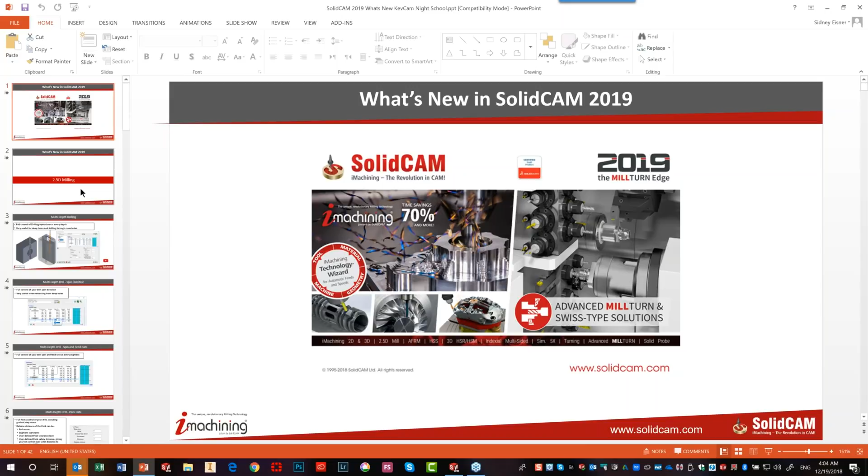Okay, so let's get going. What's new in SolidCAM 2019? I'd like to start off with one of the new features that we have inside 2.5D milling, and we call this multi-depth drilling. Multi-depth drilling is something that can be used for both deep hole drilling and for parts where you have cross holes. This particular type of operation is a completely new operation, and it gives you full control of how you want your drill to move through your hole. It's a completely manual operation, you can tell it to do exactly what you want. This is very important, especially for deep drills and for cross-hole drills. I'll give you a demonstration of that in a moment.

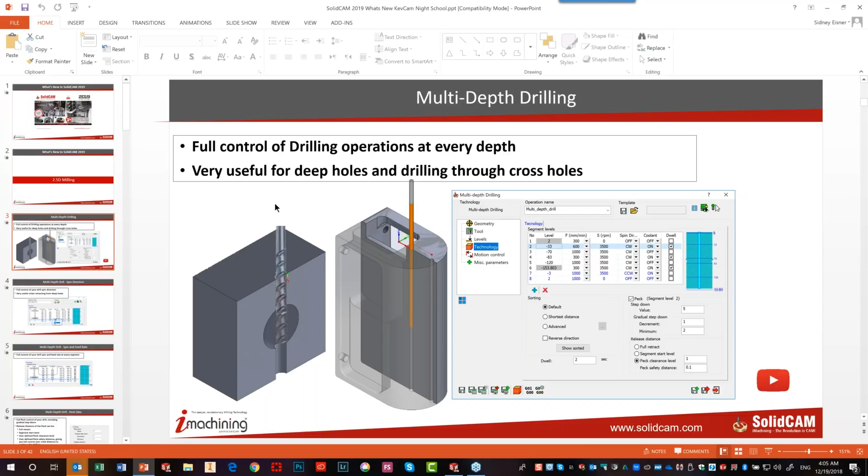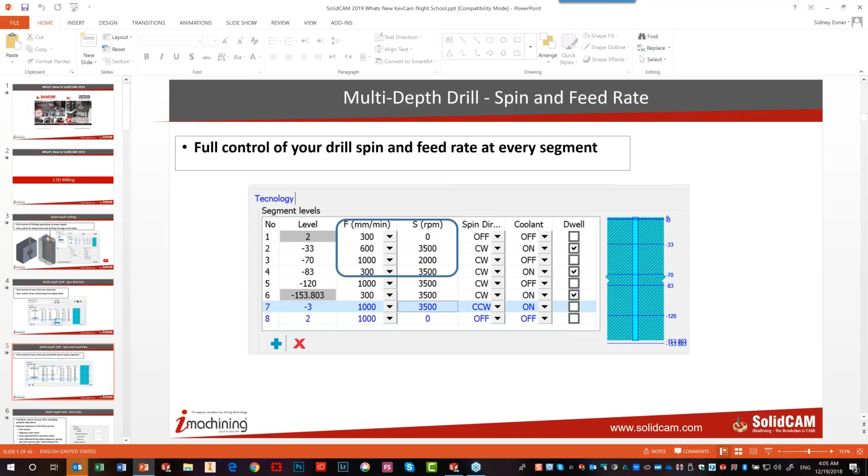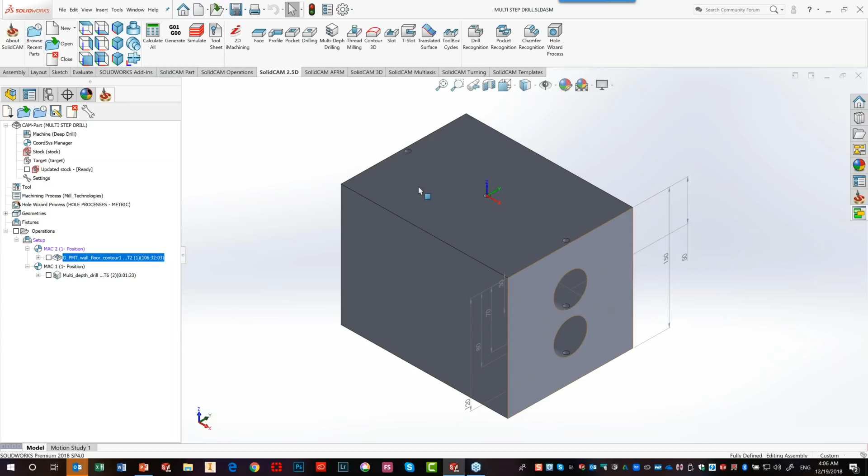Okay, we give you complete spin direction control. We also give you complete control at every single level of your spin rate, your feed rate, and also pecking. At every single point you have complete control of what's going on. Now I'm going to upload a part here for a moment. What you see here is a simple part, but the idea here is as follows. Let me just do this, you can see a little better what I'm talking about. You'll see that I have holes going through the drill.

I also have cross holes going through the part. Now, up until now, to get complete control in your regular drilling operation, it was kind of difficult, because what I'd like to do is drill out over here, and as I'm going from here to the next point, go directly down without pecking, then continue pecking here, then go directly down and continue pecking here. This is something I was not able to do in the past. I would have to come up with some kind of workaround or even write it by hand if I wanted to do something like that.

So we've added a new operation called multi-depth drilling, which we can see also over here. I've created an operation already. I'm going to show you the operation that I've created, and then I'm going to suppress this, and show you step by step how I've created the operation.

If I were to go into the operation I have over here, you can see in the beginning it starts out like any old drilling operation. You have your geometries, your tools, your levels exactly the way we had it previously, and we're going to a total depth of 150 millimeters. Now, the big difference is in technology. This is where you have complete control. This is how it looks after you've programmed it.

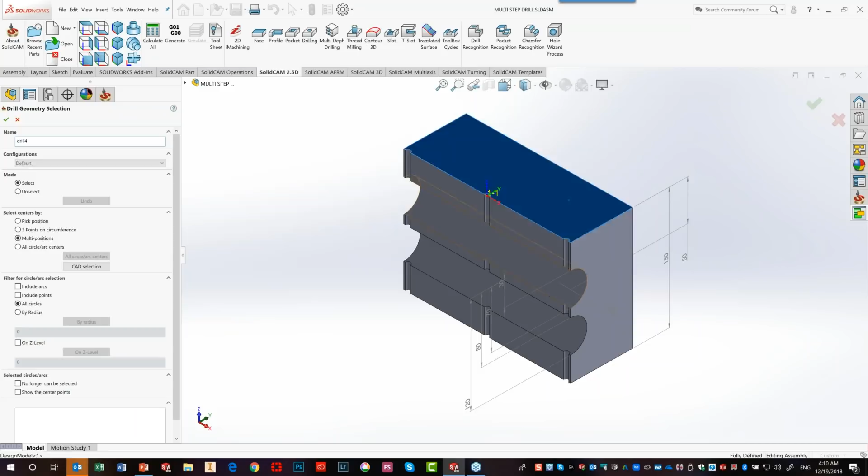We'll create our geometry. In this particular case, I want the 3 holes that are over here. I'm going to choose my drill. In this particular case also, it's this one over here, a 6 millimeter, just under 1/4 of an inch drill.

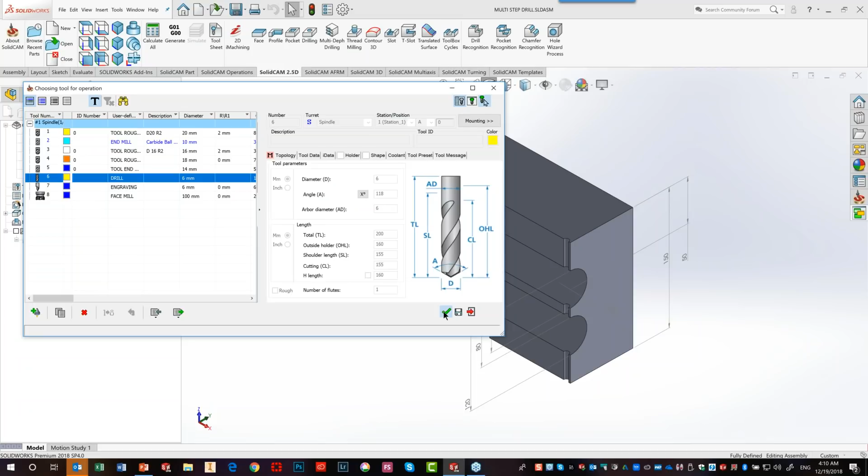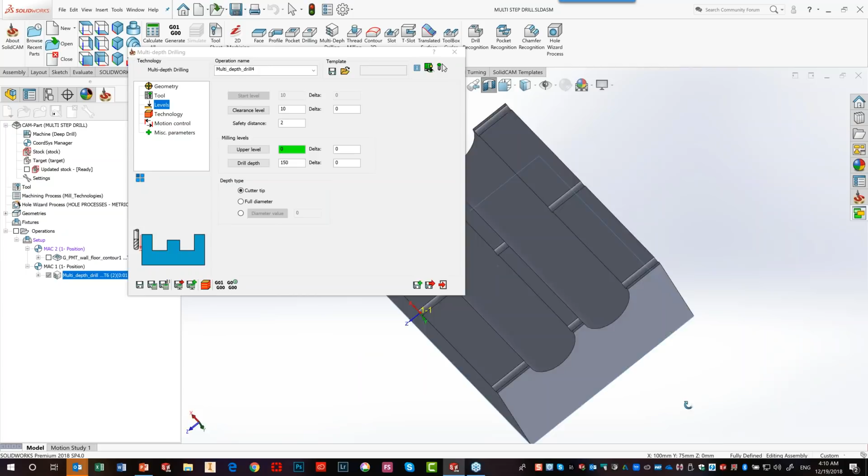That is approximately, you can see the length here, about 200, which is about just over 8 inches long, and you can see how much is outside the holder as well. My levels, upper level is at the top over here, my depth is at the very bottom over here. Sorry, here we go, my mouse is giving me a little crazy over here. Just a second. I think that mouse needs a cup of coffee too. Yeah, I think so too.

Okay, here we go, there we go. I have to be inside the field. Now I need another cup of coffee. Here we go. Okay, so now I'm going down to that depth, and I wanted to go full diameter, and I also wanted another -2 on my delta. So we have 152 plus whatever the full diameter will give us.

Okay, up until now, we work just like a regular drill. Now let's go to technology. In the technology, as I mentioned before, you'll get the start with the safety distance and the end over here, the actual bottom, okay?

You can't go lower than the bottom because that's the end. That's the final level that you have decided to go to at the very end over here. Now, how do I add a segment?

Before I add a segment, I'd like to set my spin direction. Since it's the very first one, I can have it go in any direction I want, but I want it off for now—no spin at all. You'll see my spin rate turns to 0. I don't need coolant, so I'll turn that off, and I definitely do not need dwell on at this moment.

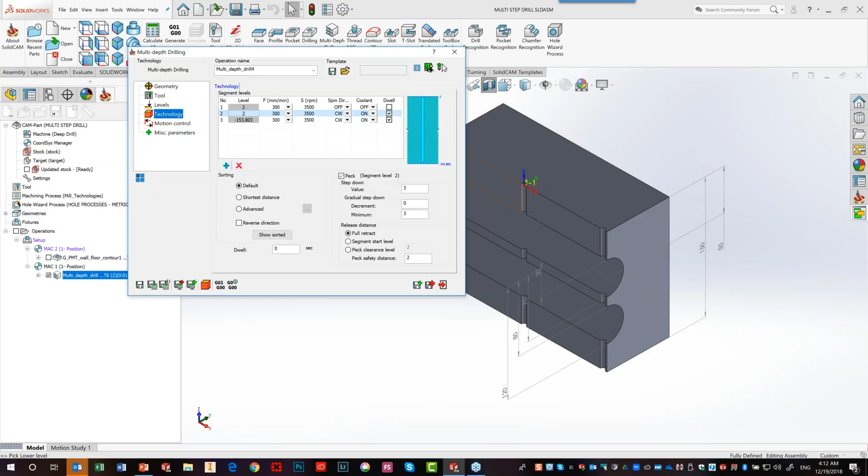Well, if I take a look at my part over here, I see I'm going to go down, and that's 30 millimeters. So I'm going to say, okay, I want it to go now to -33. At what feed rate? Let's say I have a feed rate of 600. Okay, I'm going to leave my spin rate over here as shown.

This should have been 0. Just a second. Okay. I'm going clockwise. I want my coolant on, I want my dwell on, and I want to have control of my peck. Now let's take a look at how we can control our peck over here as well.

If we see our peck is checked on, I'm going to say, okay, I'll go down every 5 millimeters at a peck. Now, we also have an additional option over here of gradual step down, where I can say, okay, I stepped that down 5 millimeters, but I want to decrement at every single step down by 1 millimeter. So my first step will be 5 millimeters, my next step will be 4, until I hit 2 millimeters. Once I hit 5, 4, 3, 2, it'll stay at 2 millimeters and keep on pecking at that level.

Now, next over here, we have our release distance. Do I want to go all the way back, or do I want to go back to the start of my segment? Or I may want to do something else—go to peck clearance level, where I say, okay, when I peck, I only want to go up 1 millimeter, and when I go back down towards my part, I want to go 0.1 millimeters, so very, very close to where I actually stop. So I have complete control.

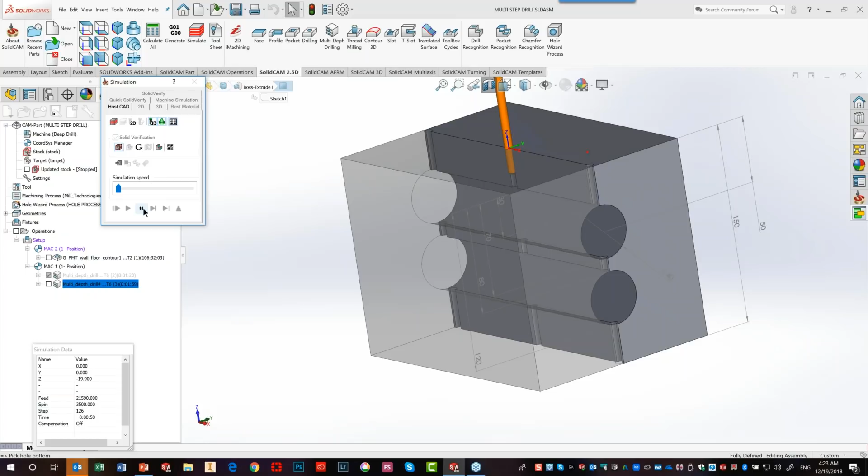And as he's playing that for you, guys, the real nice thing about this too is you can use a regular drill bit, but you can also use a custom form tool as a drilling operation. So let's say that custom form tool needs to be pushed pretty hard through the first half, but that second half, as it enters a larger diameter or a counter bore, we want it to slow down a little bit. This is right where this comes in very handy for you guys as well.

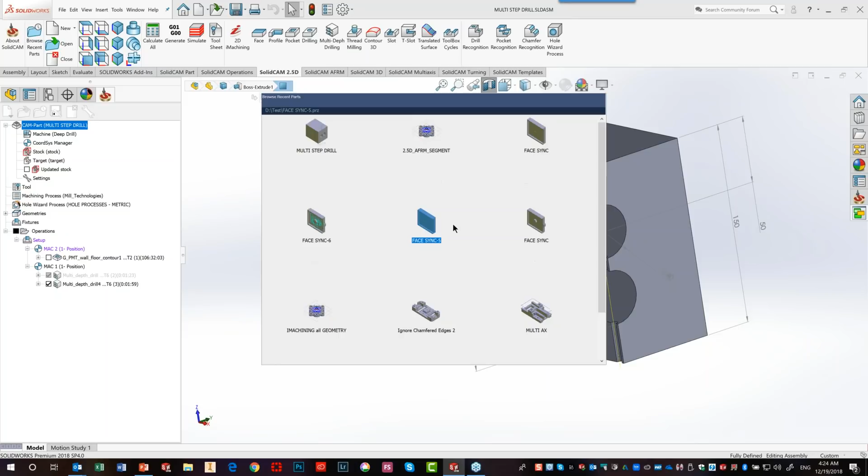Okay, now one more, let me open up just one more part for this, just a second. Let me see if I can see the parts. I just have to open it here.

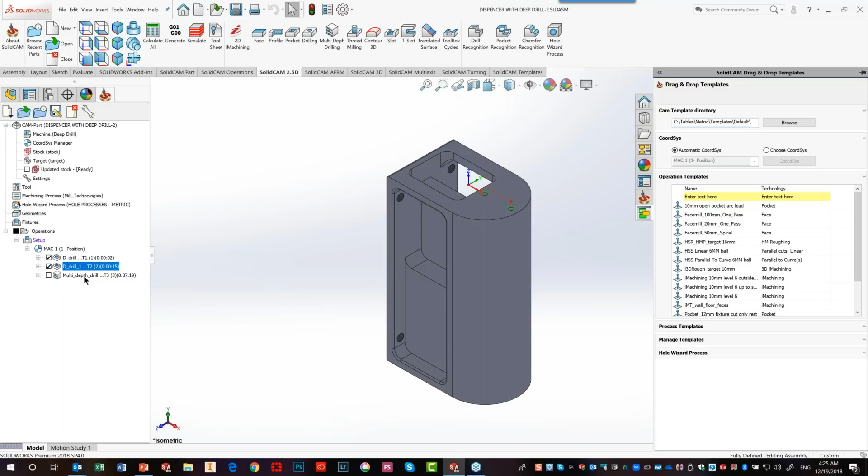So just another example. I'm not going to program this already because I have it done over here. This part is actually a very long part, no through hole, just a very, very long part. So what people may do is a regular drilling operation at the beginning, a spot drill, and then a regular drilling operation, going down as far as they can with a regular drill. Then for the deep drill, they'll do something like this. I'm just giving an example. You have your levels going down 250 millimeters.

And into your technology, they'll go down to 2 millimeters. Now between 2 and 5, they'll keep their spindle off, because as it's going down in from the very top, you don't want to start spinning it. You want to go into the hole that's already there without spinning, because if you start spinning a really long drill while it's out there with no support at all, it's going to go flying all over the place. So that's just another thing I wanted to show you over here as well.

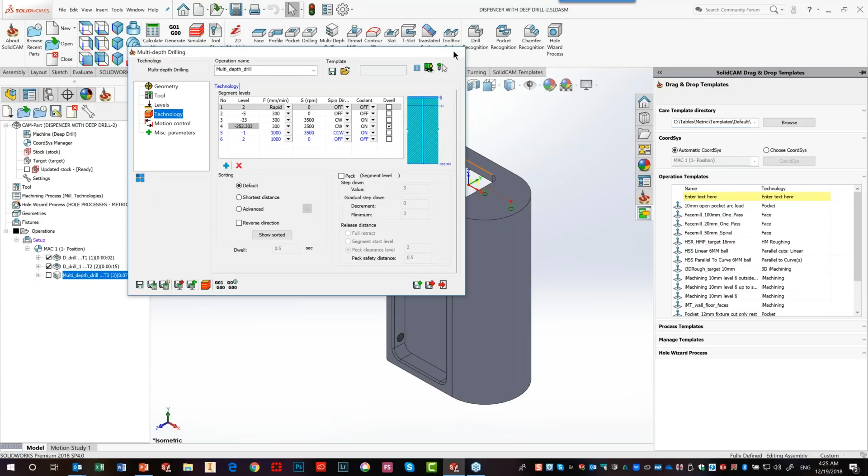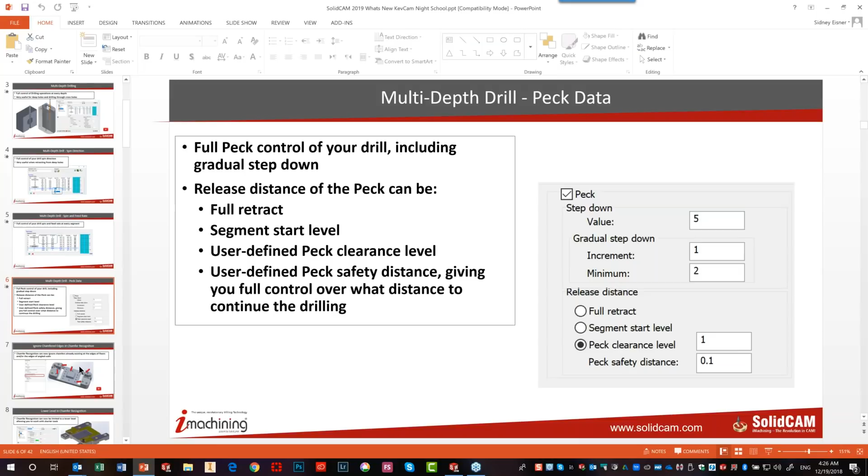Okay, so now let's go to our next feature that I'd like to show. Where was I? Ah yes, chamfered edges and chamfer recognition.

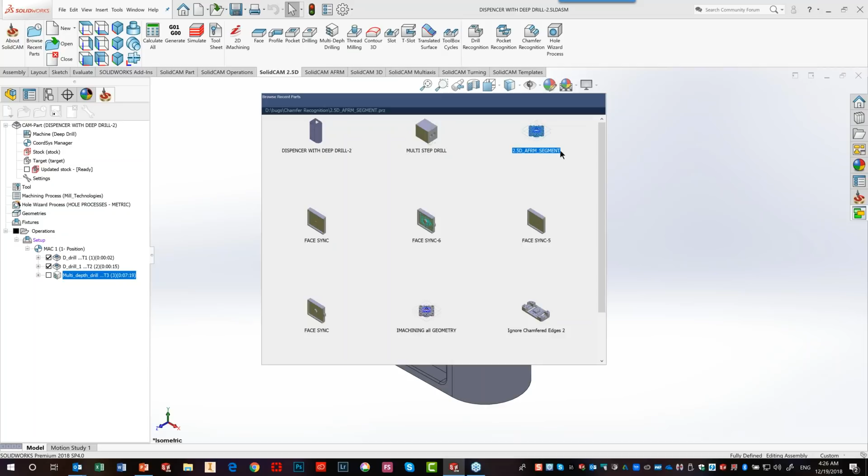Now one of the problems we always had with chamfer recognition is that it would take all of the edges, even edges that you may not have wanted it to take. For example, if I were to show you this part here, let me load it. Let me see, where are we? We are over here, there we go.

In this particular part, what you can see here is very simple. I'd like to do chamfer recognition on the part. However, if I was to do chamfer recognition, you can see that we want to do the edges over here, but this edge already has a chamfer on it, and I don't want to grab that element to put a chamfer over there, because that's not going to help me. Now even this I may not want, because this already has an angled wall, and I don't want to put a chamfer over there. I just want to keep it exactly the way it is. So there are certain edges I do not necessarily want to have, because they already have some kind of angle on that wall itself.

So let me just suppress what I have over here. I have to actually delete what I did over here. Delete it. Okay, and what I'm going to do is go into chamfer recognition. I always like, by the way, using the 3D model protection. Always helps.

Now, up until this point, if I click on the part, my minimum diameter would include these edges over here as well, and these edges, and I really don't want that.

And my levels - one more thing, since I'm here already, we've made a change in our levels as well. We've added the option of controlling between which levels you want to put your chamfers on. This is extremely important. Sometimes you have a part that's very deep, and your chamfer tool may be relatively short, and you don't want to go that deep into the part. So now you can control your lower level, but right now I don't need it.

So I'm just going to put in my chamfer depth of, say, 0.2 millimeters. My technology stays the same, cutting diameter, and my links - I can put in any kind of link I want. Let's put in a link of an arc.

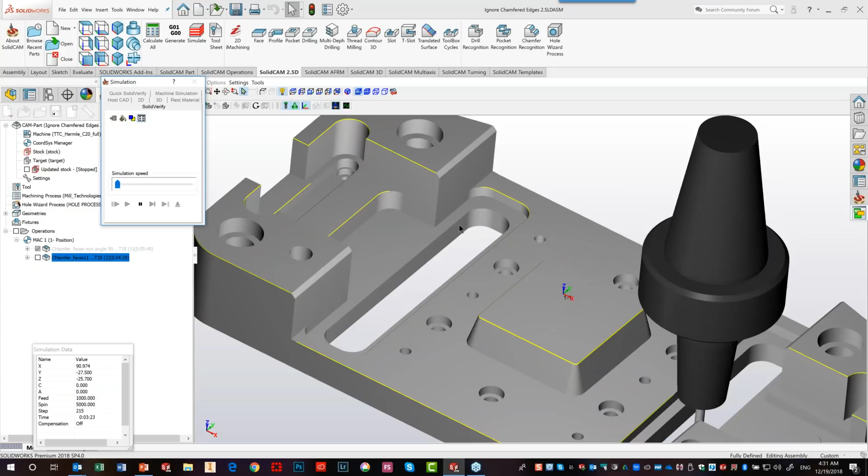This has been a huge request by you guys, being able to really control that chamfer recognition. So now this gives you the ability to really fine tune that chamfer recognition for what you guys were looking for. That just kind of goes to show you guys that we definitely listen to you guys when it comes to what you want to see in the software.

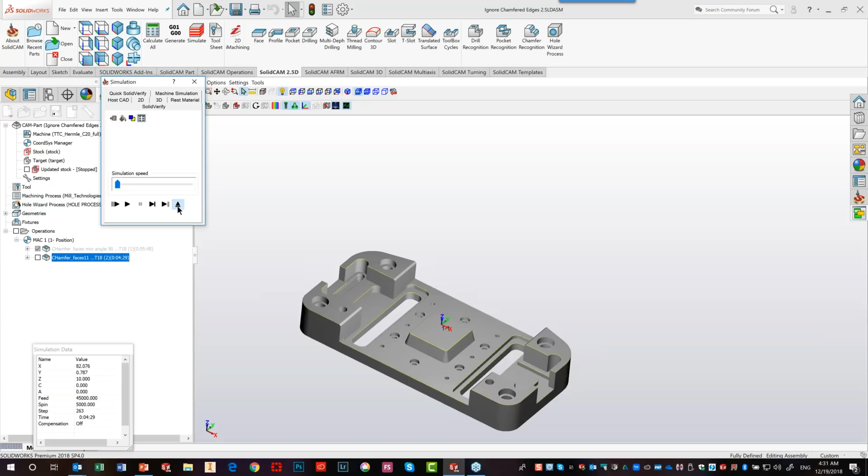That's right, and I may have had a problem listening before, but that problem kind of got resolved when I got hearing aids put in, so I have no problem listening to people now. Okay, all right, I like to add a little humor every now and then. Okay, now let's continue on.

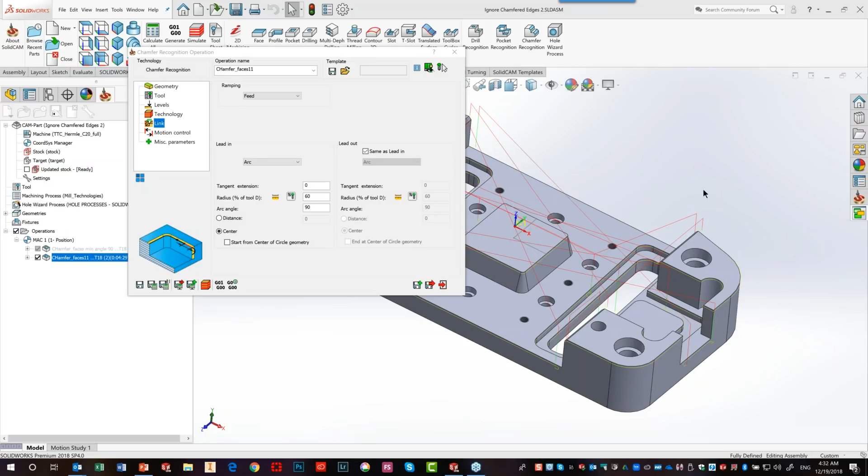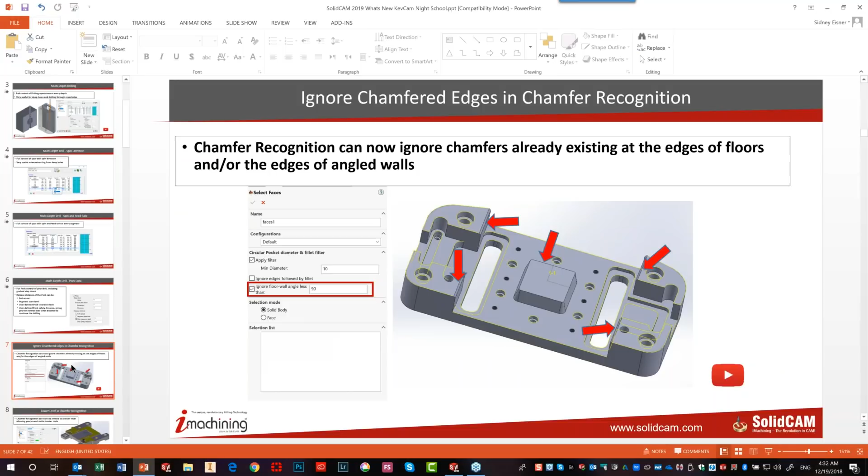Okay, so that's what I talked about. Where are we? Over here - lower level and chamfer recognition, I had mentioned already.

Yes, multi-tool in-pocket operation. In 2018, we had added multi-tool inside iMachining. We've also added the same thing now inside our pocket operation as well. For example...

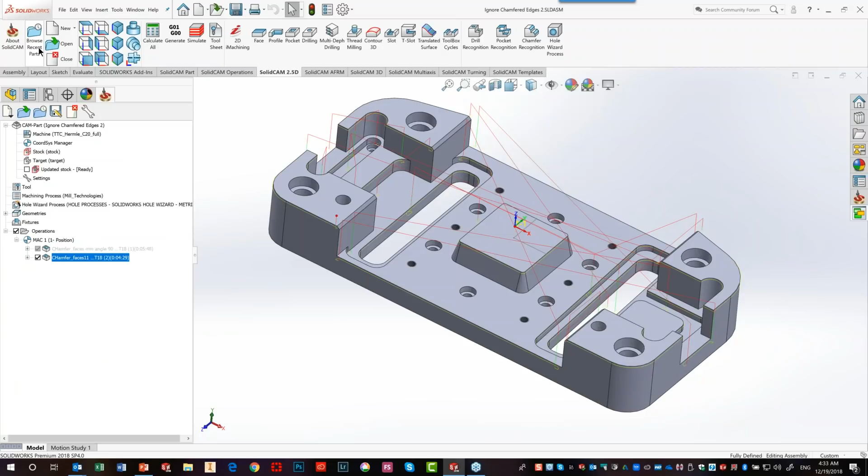Let me open up a part. Not browse, I'm going to open actually a part. Yeah, I'll do this one, that's good. Also good.

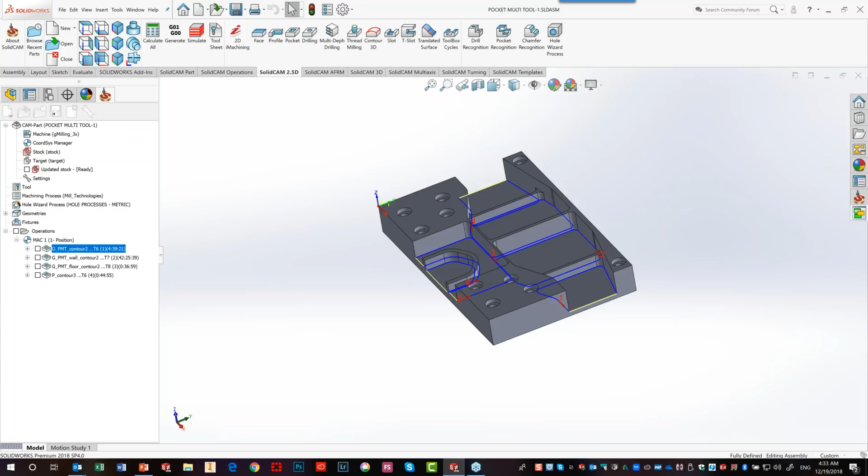I'm just going to open up the operation that I created already, where I want to do several pockets over here. And we have here what we call multi-tool. So if I go into my tool, you can see you can select several tools over here, just like in iMachining that we had before.

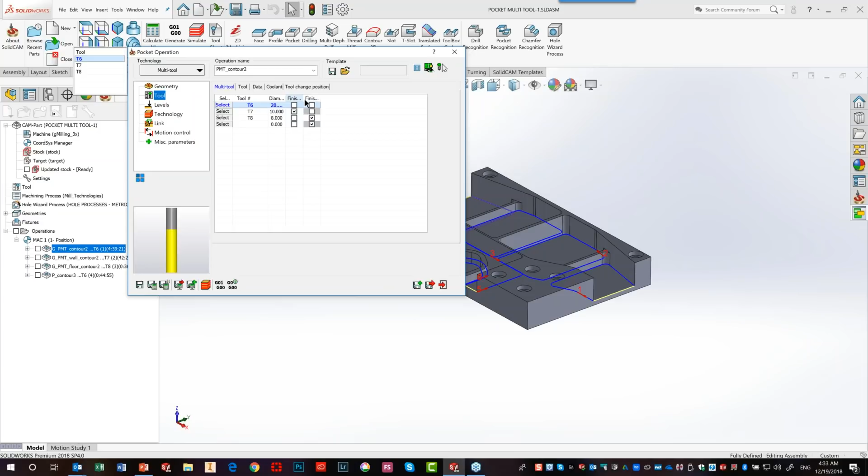And I can also tell it over here if I want to have it do a finish on the floor or wall. Let me enlarge that - and the same thing over here. So within one operation, I can use three tools, and the result will be three operations.

Now, if I go and edit from any one of these, say from the second one over here, it brings me back to the base operation, but to that particular tool. In the technology, it's the technology for that particular tool with the wall finish checked off. If I go to T8, you'll see that the floor is checked off. If I go to T6, which is just the roughing, you'll see nothing is checked off.

These are controlled, by the way, by this over here.

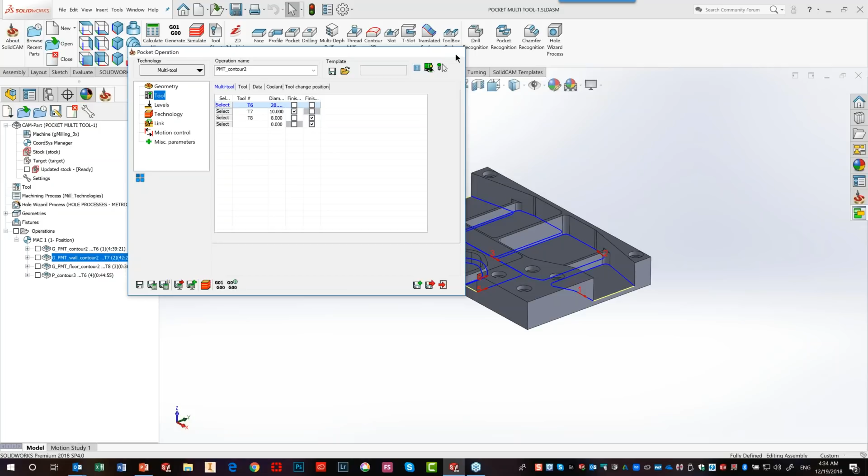Okay, so that is the option of the multi-tool, just like in iMachining, but we have it now in Pocket.

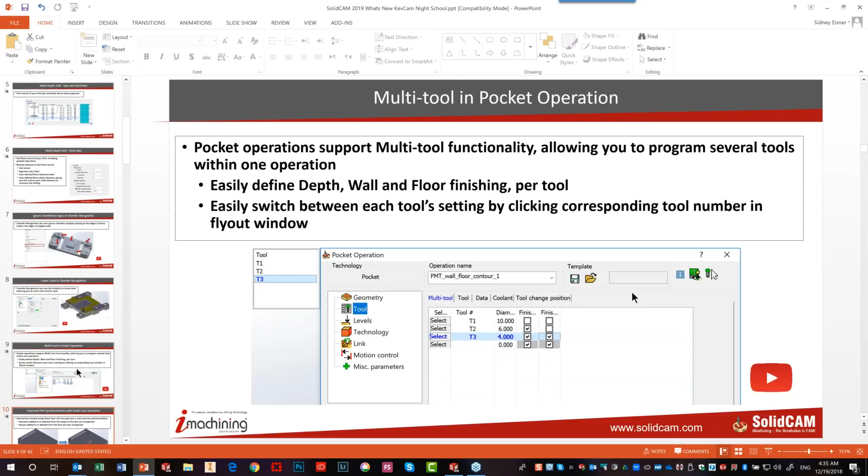So what we've done is as follows. Let me load that part. On purpose, I took a very simple part, so you can see exactly what's going on. This is made possible, by the way, by the use of SmartFace for creating your geometry.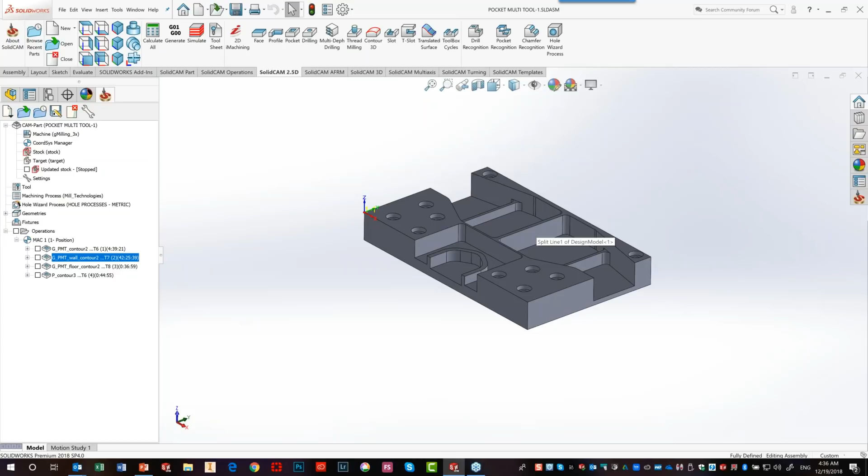So, for example, if I were to go to a pocket operation, choose my geometry using SmartFace to create my geometry - I always use SmartFace to create the geometry. I'll choose the tool, and I'm going to choose, let's say, that one, doesn't make a difference really. And my levels will be down to this point. Let's just do it at one time. We don't need to have everyone watch everything.

I like to work, use profile strategy. I'll leave the links as it is, no problem. Save and calculate. Okay, and you can see the toolpath does exactly what I expected it to do.

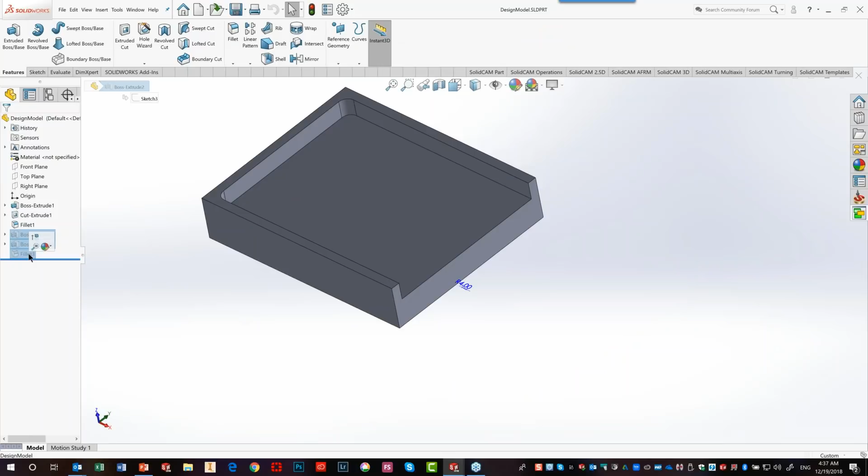Now what I'm going to do, let me go out over here, let me get rid of this. I'm going to open a part, and add something to the part. I'm going to add this boss over here and this over here. Now I'm going to the part. Obviously, I'm going to save.

And I'm going to check for synchronization. And you can see it needs to be synchronized. So I'm going to synchronize my part. And all I'm going to do now is take this and calculate it.

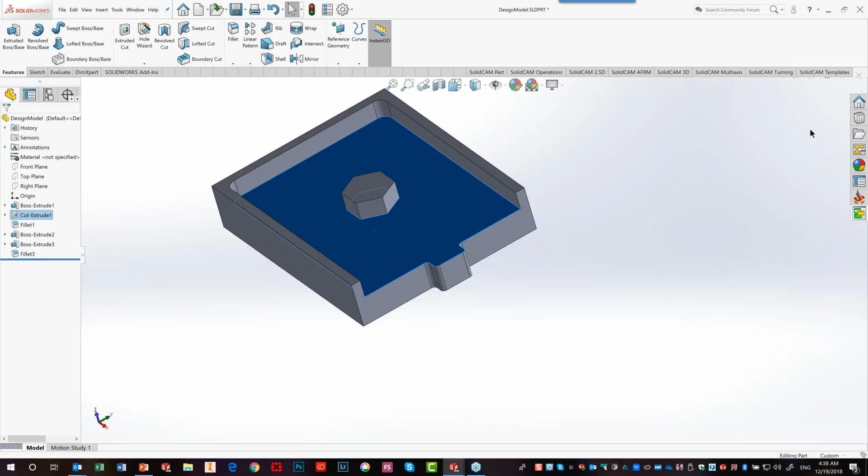As my geometry, we tagged the actual face itself, and we saw a change on the face that were related to those geometries, so to the change itself. So the change itself was now completely updated. So your synchronization will work a lot better now when you use SmartFace. So we physically linked ourselves with that SmartFace with the SolidWorks face itself, even though we added geometry in there, which would normally throw up a caution saying something has changed. Now, since we're using that SmartFace technology, it's automatically adapting to that new island or multiple islands in there. So just to show you guys that the associativity between SolidCAM and SolidWorks is extremely strong.

All right, next. Let me see what else I have up our sleeve.

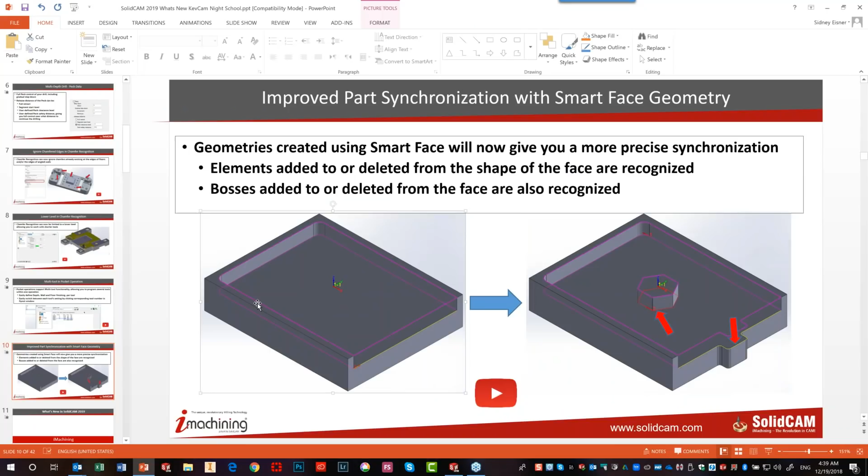Okay, now let's get to iMachining. iMachining, if you open it up in 2019, will look different to you. Now, we like to call it iMachining feature recognition, because what it actually does is recognize where your stock is, how much stock is left over. All of this is actually taken into consideration.

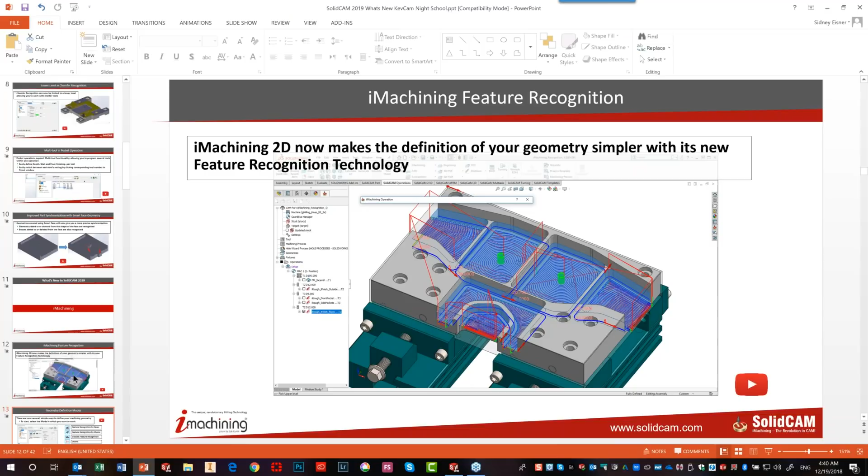Now we've added 4 different ways of selecting your geometries. You can select it just by faces, or feature recognition by chains. We have something called outside feature recognition, which will automatically recognize the outside shape and machine the outside only according to the stock that's left over on the outside. And then your old-fashioned way of, the way we work today, of just chains.

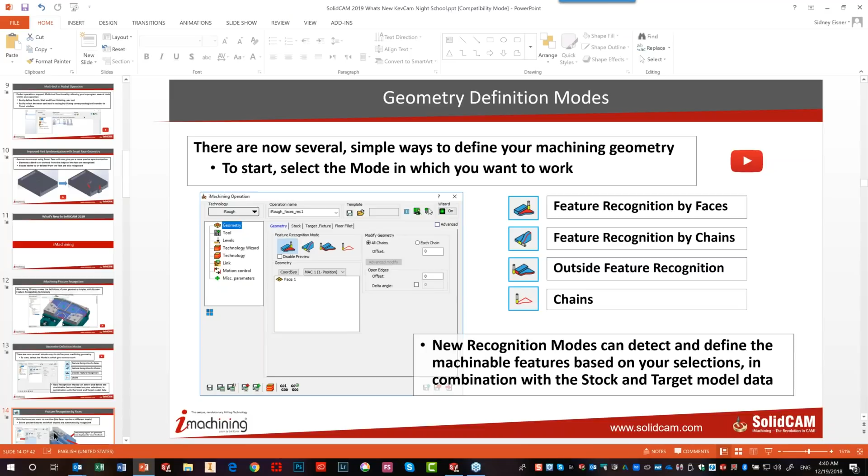Okay, let's see exactly how this is done. There's a lot more slides in here, it involves everything, but I don't like to always show the slides. I like to actually show it on the part itself. So what I'm going to do is open up a part. There we go.

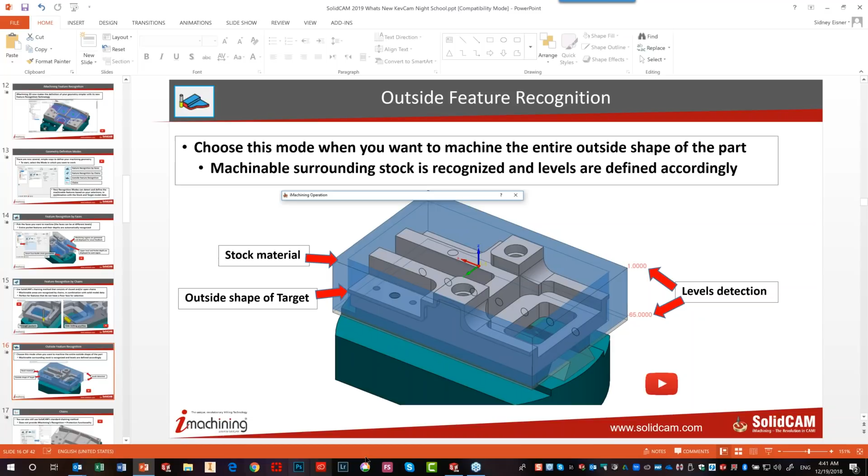Browse, and I'm going to open up. Yeah, I like this one. This is a good one.

Okay, now I just want to remind everybody, I personally, at this point, since I work a lot with development, the version I'm working in now is even just like the release of 2019 SP0. However, it's a development version because I also work in development at the time. But basically, everything is the exact same thing.

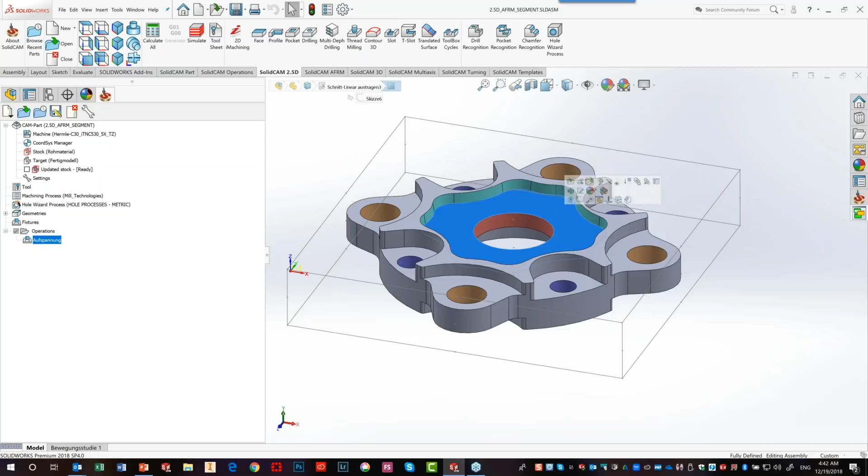Let me delete what I've done over here. The first thing I like to do when I go into my iMachining, if you take a look at the part before I even go into the operation itself, you can see we have different levels of floors over here. We even have this one on top over here, and we also have stock on the outside. If I show you the stock, you'll see that my stock is all the way out over there.

Just for your information. Okay, so I'm going to start my first operation. You can start it in multi-tool, or you can put it over to wherever you want, like in iRough, or iRough and iFinish, whichever way you feel correct.

Now you'll see over here different ways of choosing geometry that I mentioned before. We have, like I said, choosing faces, which I'll show you in a moment. Then choosing regular geometry is exactly the way we were used to, but it takes the stock and the features already on the part into consideration - outside feature recognition versus your regular chain features without any stock recognition or anything like that.

I'm going to start this operation. I first want to machine the outside of the part, so what I'm going to do is just click on that. When I click on that, you'll note there's no geometry that has to be picked - it'll automatically recognize the target and whatever stock is outside of it. So I'm not picking any geometry. The tool I'm going to use, I'm just going to choose whatever tool I want to use in this particular case.

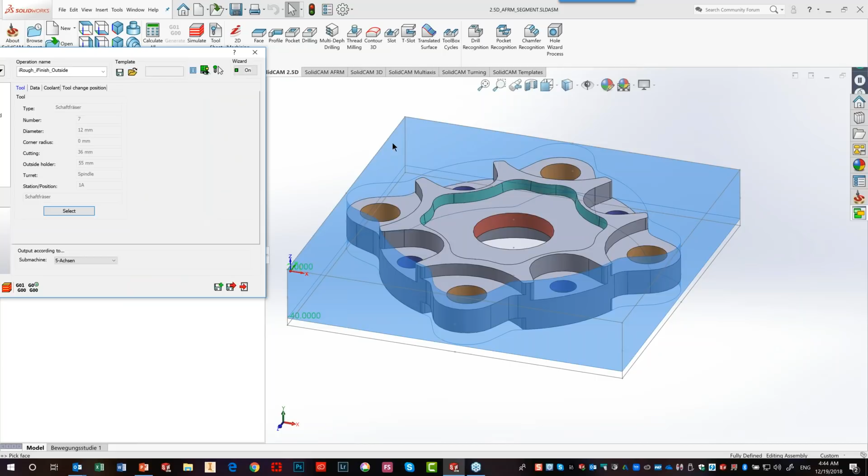Now, what's nice also, it gives you a preview over here of what is actually going to be cut. So you can see that's the outside material and what's going to be cut on the part. You'll also note your levels - it automatically recognizes what your upper level is and how far down you want to go. All I'm going to do over here, everything else is the exact same thing, is save and calculate. When I save and calculate, we'll take a look in a moment what the results are.

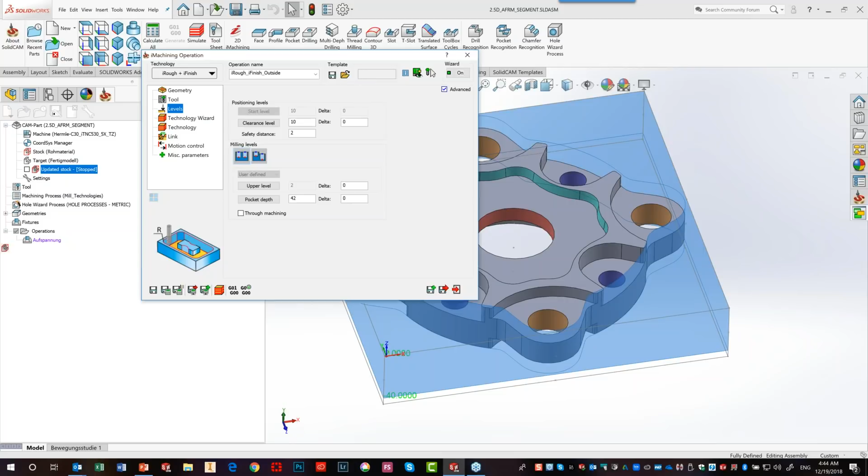And what's nice about this is that you're actually getting visual feedback as you're working on the part itself. Okay, it's been calculated, just showing the toolpath.

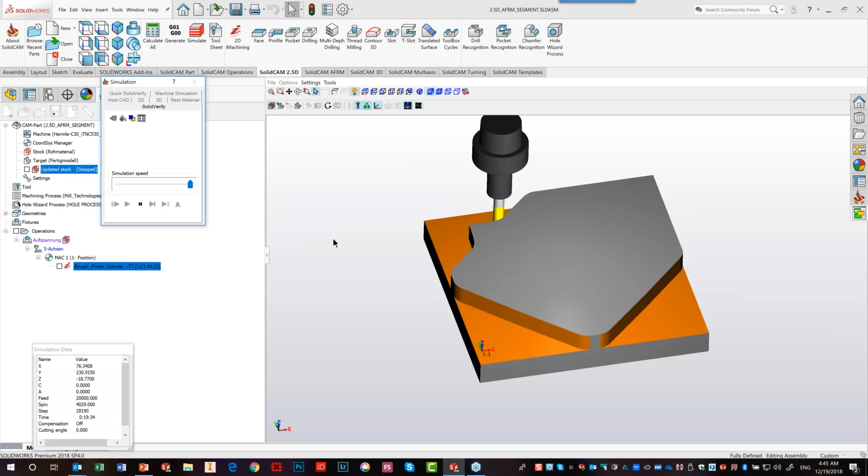If I run my simulation, let's do it using SolidVerify. Let me run it quickly. You'll see it's running on the outside of the part itself. All I did when I picked the geometry was tell it I wanted to work on the outside, and it knows automatically to recognize the outside shape of the part itself.

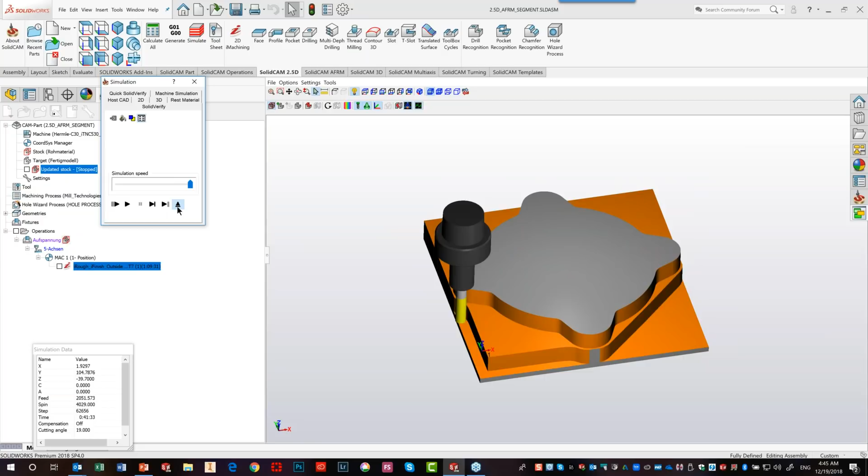And you can see that as it's going down, it's going down to the next level, doing the exact same thing until it finishes that particular shape. I'm going to stop it for now and go out of here.

You'll also notice that with the shape of the part, if you wanted to do an outside geometry of this, it'd be kind of difficult because you have steps over here in the bottom, and you'd have to go up and out. So creating a chain geometry on this would make it kind of difficult. So this was made a lot easier, and also the fact that it recognizes whatever stock was left off on the outside.

Okay, now, not that I want to work this way, but I'm just going to suppress this for a moment. What if I wanted to go directly without machining this stock yet, and I wanted to work on these pockets over here? I'm just going to do one for now. I'm going to choose my iRough, iRest geometry - I'm just going to use that pocket over there. You can see the face over here. Click on it again, by the way, and that face will go away, it's like a toggle switch. Okay, I'm using that face and choosing my tool.

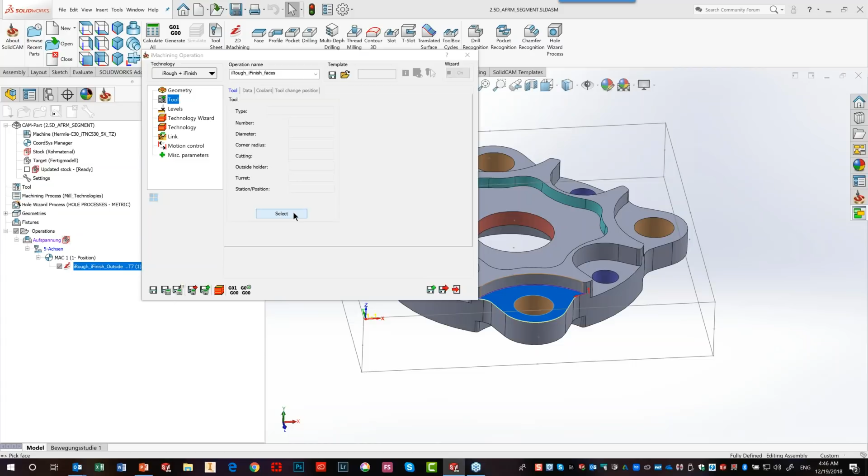Okay, use that end mill over there. You'll note the preview already. It's showing you that it's going to be cutting and it's going to extend itself to the stock that's on the outside.

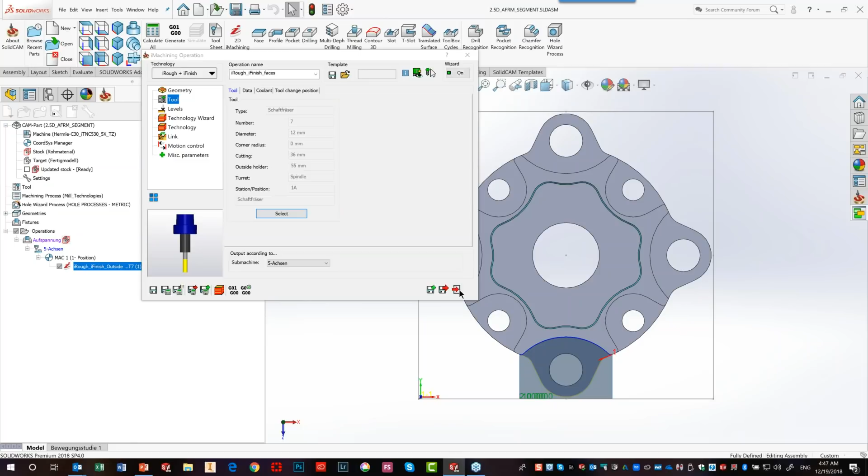Okay, now I'm just going to go out of here. I didn't want to do the operation. I'm going to unsuppress this. This time I'm going to go in, and since I've already machined this area, it won't extend itself to the outside. So I'm going to do iMachining 2D.

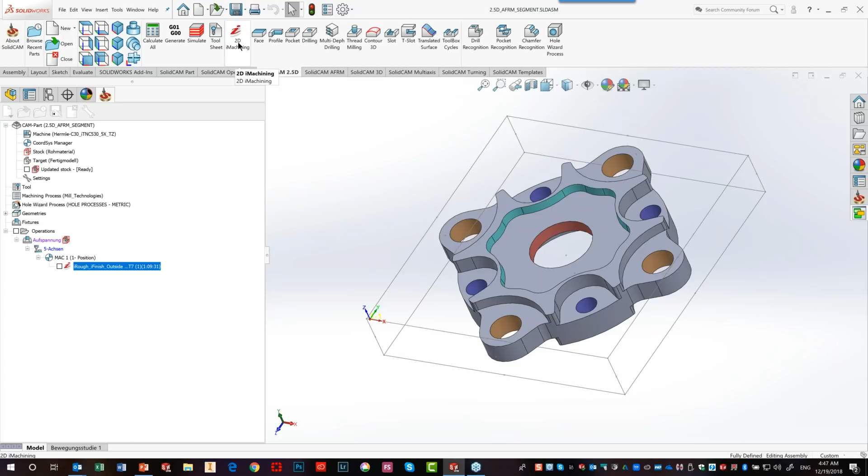And now I'm going to use the option of feature recognition by faces. And all I'm going to do is click on the faces. I'm going to click on this face, note I'm going to click on this face as well, and this is on a different level. Okay, choose that face, that face, that face, that one, that one, that one, even, okay, this one, and this one here as well. So we have 9 faces that we want to work on.

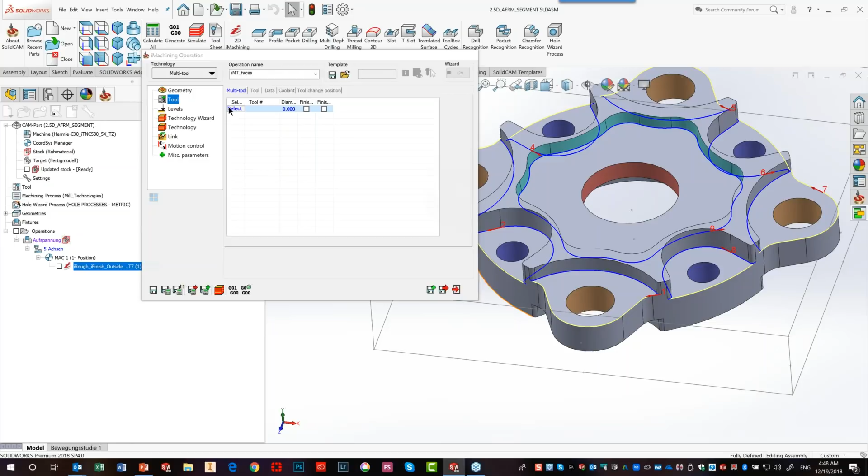Okay, I'm going to choose my tool, my end mill. Okay, I don't want to work in multi-tool. I can work in multi-tool also, it doesn't make a difference to me. I'm going to choose my end mill over here.

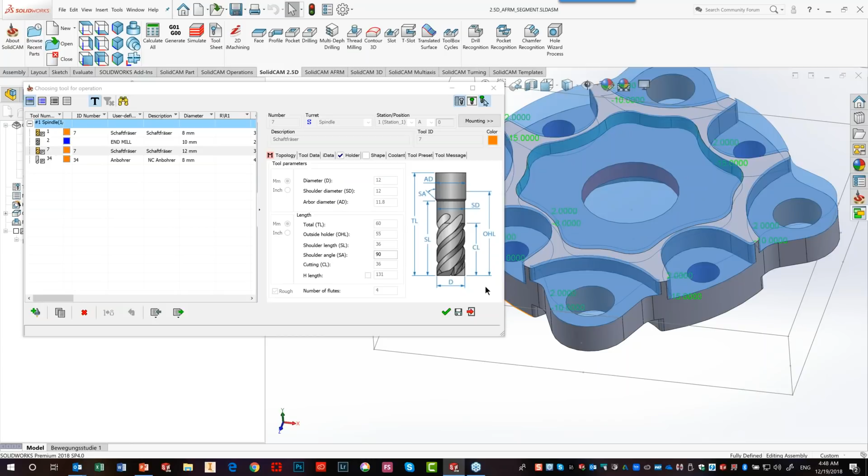Okay, now what I'm doing actually is updating the stock because it needs to see exactly where it's going to be machining and take that into account. Okay, so you can see now that not only is it showing you the stock, it's also showing you the levels of each pocket. For example, you see it's going from 2 to -10. This one is going from 2 to -15. This one in the middle over here is going from 2 to -8.

So it recognizes also automatically the levels. I want to do finish over here, not a problem. If I go into my levels, you'll see it automatically put itself into variable levels. Okay? So this was taken care of automatically because it recognized the fact that I tagged the surfaces on different levels over here. Save and calculate.

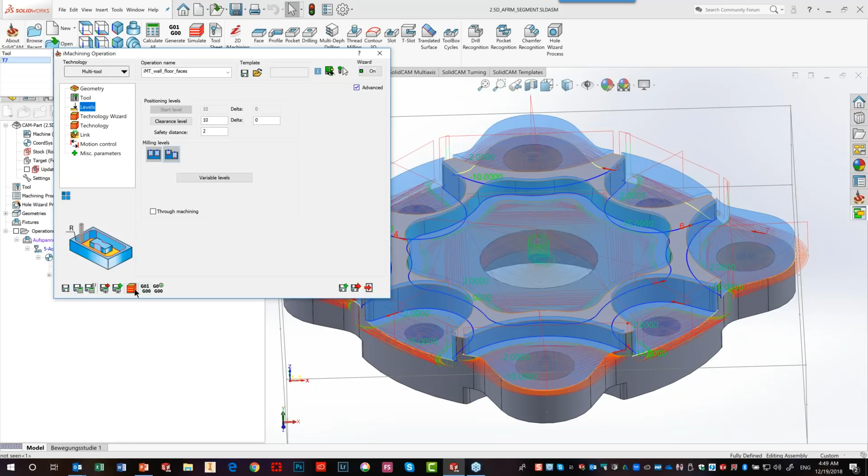Okay, starting with toolpath simulation. And as you can see, if I do the simulation over here, again using SolidVerify, it'll work on each area exactly where it's supposed to work, on the proper level as well. So that is recognized automatically.

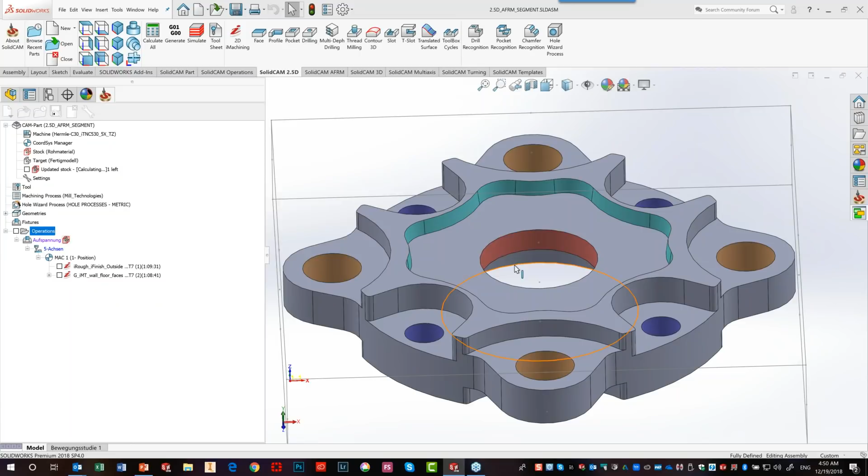Now there's one more feature I'd like to show you over here inside the iMachining. And that is, if I go into iMachining, what if I want to do an area that's a through hole over here? I want to go all the way to the bottom, okay? I'm going to do this using iRough and iFinish. So I can't use faces because I'm choosing a chain, but I still want the option of recognition.

Now note, when I have the feature recognition, if I go into stock over here, these are automatically checked: cut only rest material, extend pocket to stock. 3D model protection is automatically recognized. If I go into the one that has chains without feature recognition, you'll see as default they are not checked. But you can always check them if you want to, okay? But that's why the defaults are the way they are.

So I'm going to go now into this option over here, which has the defaults checked over there, and I'm going to choose my geometry. And just to show you the 3D model protection over here, I'm going to actually choose this chain at the very bottom of the part, okay? And the tool that I will use will be the exact same tool I used before, this one over here.

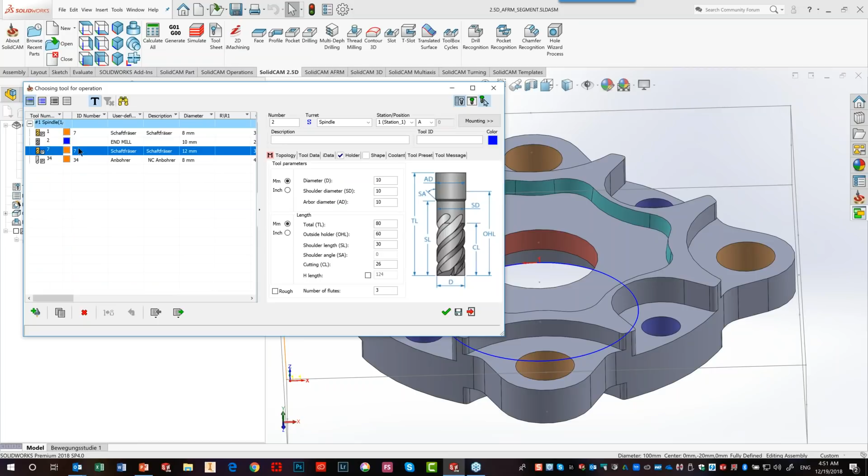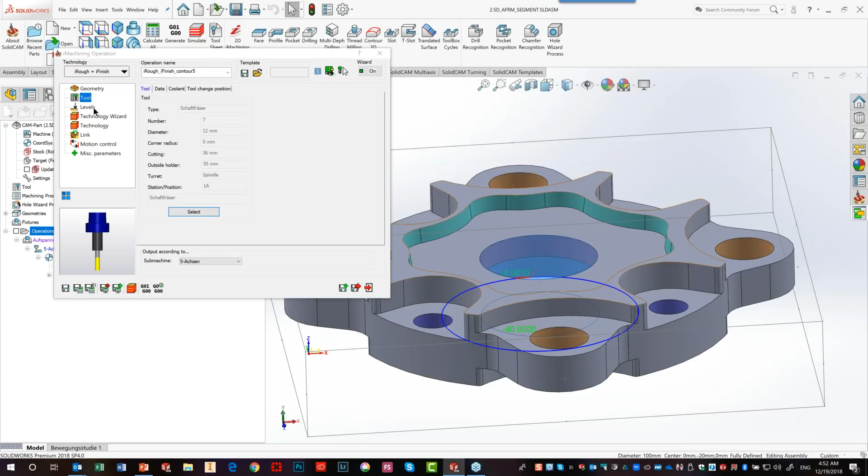Now, when it looks to update the stock, it also is looking at the actual target itself. You'll see that the upper level is -8 over here, and it's going down to -40. You can see that in the levels as well. Save and calculate.

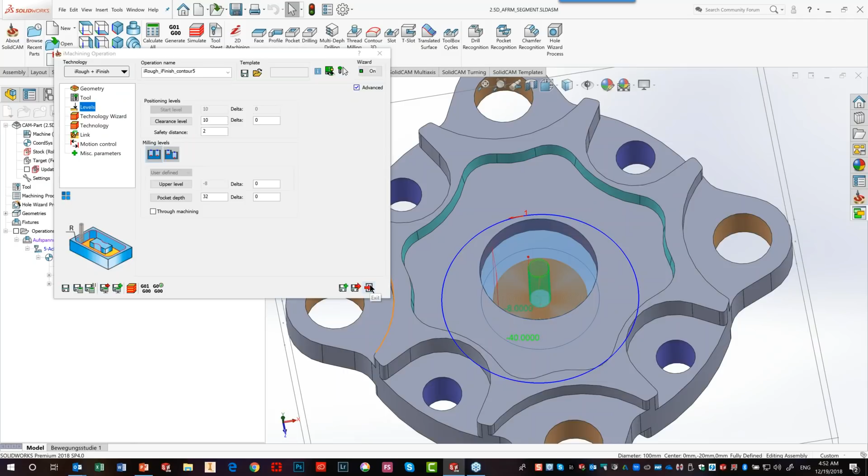And you'll see it'll just work in this area over here. Even though my geometry was out to over there, my target was blocking it from going in all the way out over there. Okay, so we've added a lot more strength also to our iMachining. Okay, now to my, I believe, my last point, which I wanted to show over here.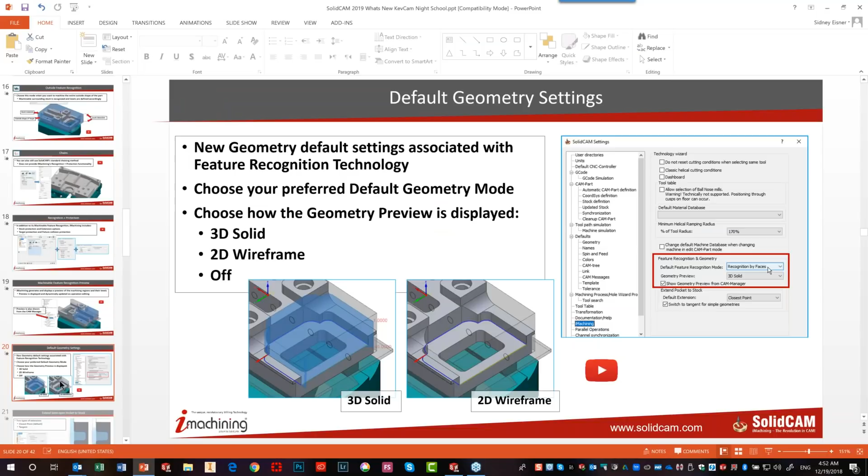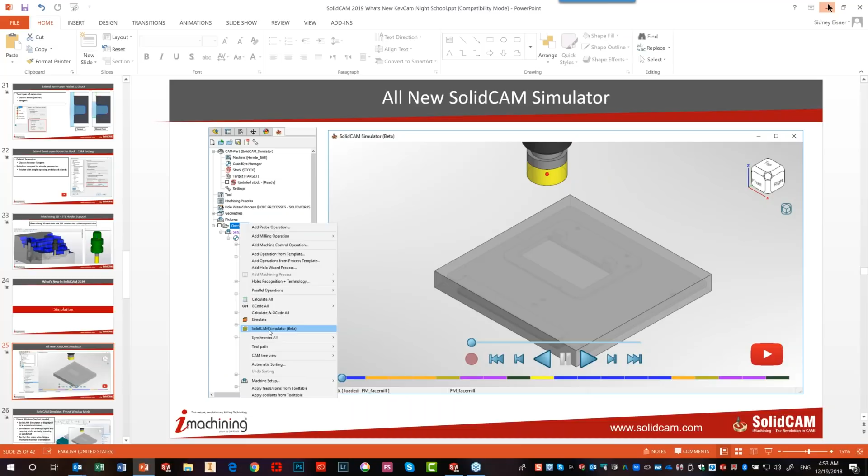Now, I can even show it in this part I have over here. I don't have to load a specific part for it. If I right-click on operation, we have our regular simulate, then we have the SolidCAM simulator. You'll also note that next to it, it says beta.

The beta version, which is what we're starting out with - the reason it's beta is because there are still improvements that are going to be put in as we go along. So we wanted to get this out, but it is still a beta version. It will be available to everybody, even as a beta version. So how do I use it?

From the operation, I can use it directly from over here. If I'm within an operation, let's say I'm over here - let's go into this from over here, I can also do it for each operation individually. From within the operation, if I hold Control on my keyboard and click on Simulate, it'll also open up the new simulator.

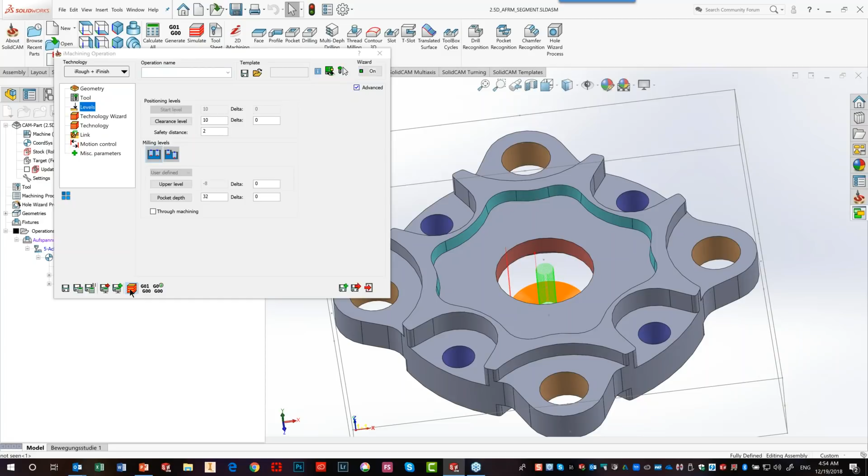Now note, let me just go back over here, close this, go out, and go to my operation part. Here we go. I'm going to do this new simulator over here. You'll note that's a separate fly-out window.

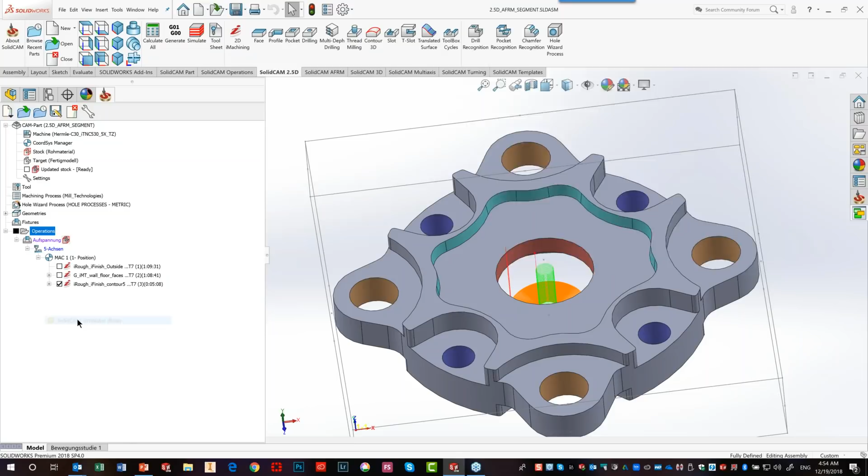Now I can also have it, if I click over here, without a fly-out window - then it will be completely integrated into the part itself. If I do fly-out window and get rid of that, you'll see it's actually part of the SolidWorks window itself over here.

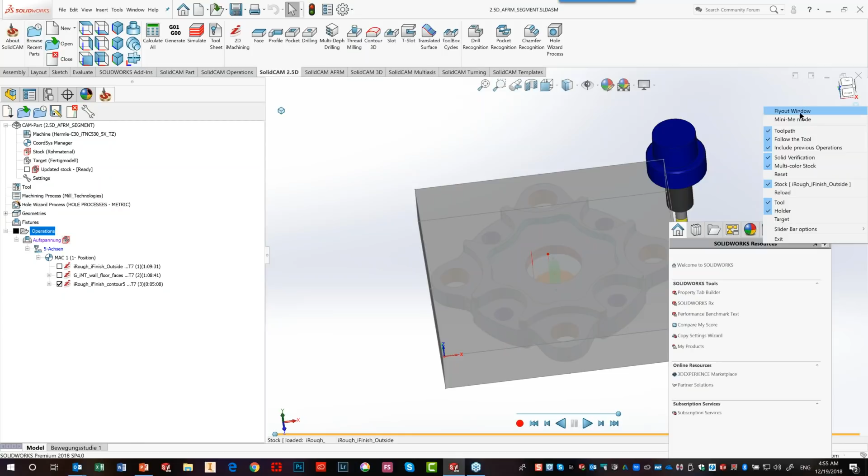I particularly like to work with it not that way. So what I'm going to do is go back in here, put the fly-out window out, and we'll work at it this way over here.

Okay, now what do we have? How does it work? All right, we start our simulation. You can see it's going along the part itself. And what's happening also at the same time, it's recording its moves. You can see that this little red line - it is red.

I'm colorblind, by the way, so if I say the wrong colors, you'll understand why. But I believe this is red, they told me. This is recording its moves.

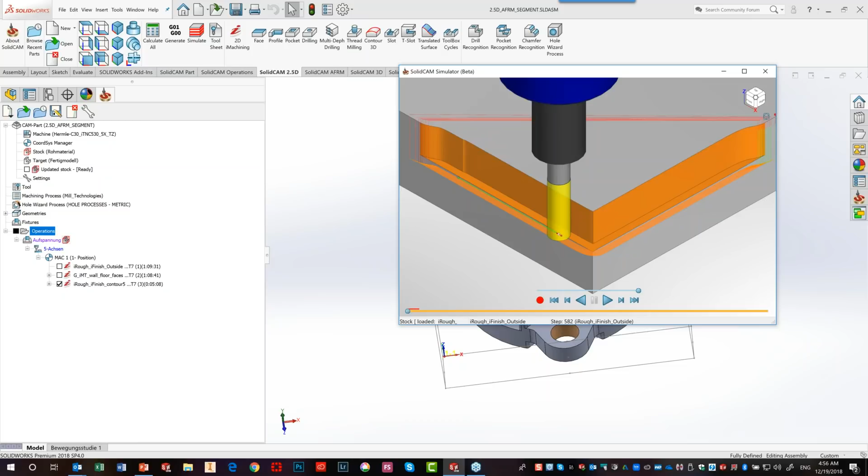What does that mean? Let me stop it for a moment, I'm going to pause it. If I were to go to my toolpath, you can see the actual toolpaths as I'm going along with it. It actually recognizes it as I'm walking along. If I were to double-click here, it'll go back to there and start the simulation again from that point. I can go back over here, or double-click over there, and it'll go back to that point. But since I haven't recorded that part yet, it didn't do it.

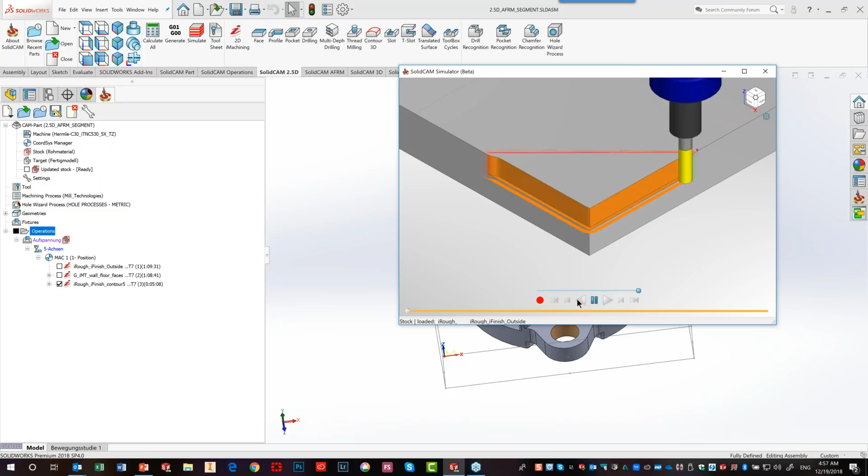So again, I can go backwards and forwards. I can stop it. I can go backwards also. And you see, when you go backwards, it rebuilds the part, and basically does more or less what you want it to do.

I think people have asked for this for quite a while - to be able to go in reverse and go back to a specific point with the simulation. Now we've enabled you to do that. Again, this is a beta version in SolidCAM 2019, and we will be improving it as we go along, such as improving the speed of it as well.

Okay, Kevin, I think I'm just about done.